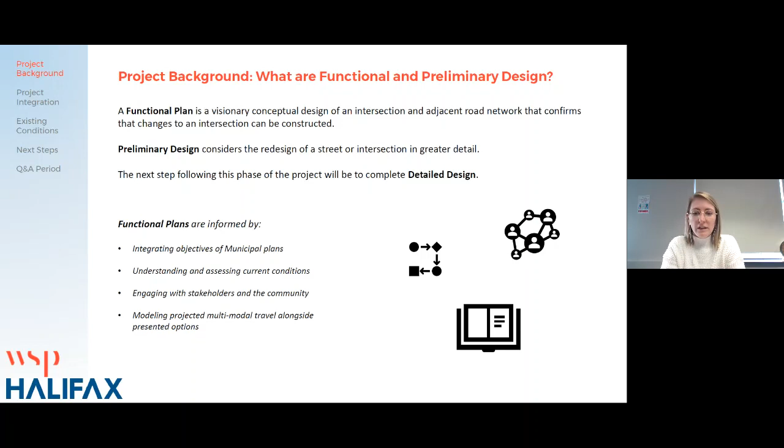Following that is the preliminary design, which considers the redesign of a street or an intersection in greater detail. As Megan mentioned, afterwards there'll be detailed design, which will lead into the construction stages. Next slide, please.

The Windsor Street Exchange was selected by HRM as an important project for a series of reasons. The first is that in 2019, funding was awarded from the National Trade Corridors Fund for the project, so it was the right time to do that. The second is that approximately 48,000 vehicles per day travel through this area. The third is that the Windsor Street Exchange is currently operating above its available capacity during peak travel periods.

The fourth is that Windsor Street Exchange is considered a poor environment for the safety and comfort of people walking, rolling, and cycling. The fifth is that the Windsor Street Exchange will need to accommodate the Bus Rapid Transit Green Line and to integrate with the transit priority from the Bedford Highway. And finally, to address the long-standing bottleneck near the Fairview Cove Container Terminal, which will improve goods movement and which is associated with overseas trade.

Next slide, please. There are three key considerations that the project team will be bearing in mind throughout the project. The first is the importance of the Windsor Street Exchange to the Fairview Cove Container Terminal, and by association, the movement of goods throughout Nova Scotia, Canada, and to overseas.

The second is the competing demands on the Windsor Street Exchange due to being only one of five road entrances onto the peninsula, which is the primary economic center of the municipality. And the third is that there are more stakeholders in this process than in usual processes, due to the many competing interests for this intersection and for the adjacent land.

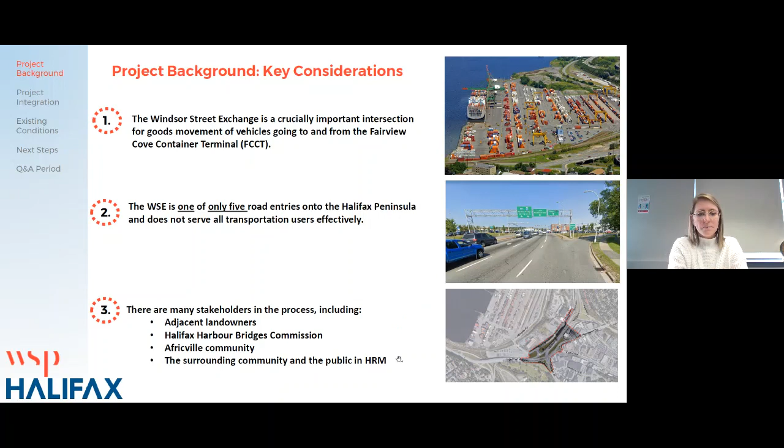We're going to have our first pause for comments here. The question we're asking is: what do you feel is the biggest concern that should be considered in the redesign of the Windsor Street Exchange? If you'd like to contribute an answer, you can follow the instructions by accessing the Q&A box, clicking on the speech bubble in the top right-hand corner of your screen, and then typing into the live event Q&A question box.

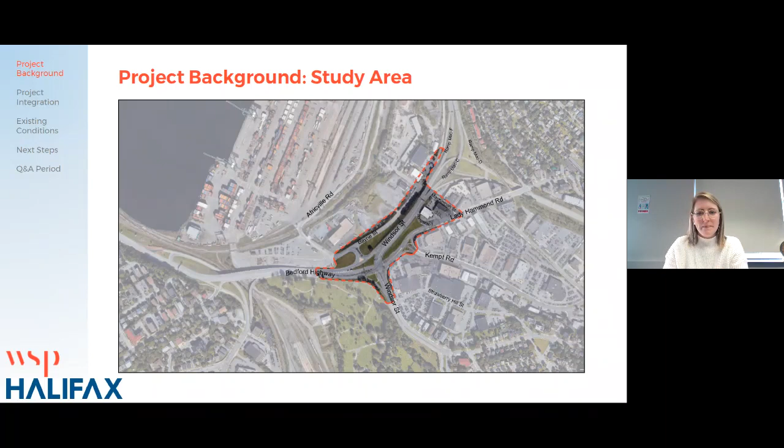The scope of the preliminary design and functional planning portion of this project will have the project team looking at how to improve safety for all road users, how to improve the efficiency and functionality of this intersection for vehicle and goods movement, how to enhance user experience and safety for active transportation users, and finally, how to integrate with the BRT Green Line from Joseph Howe Drive and the transit priority options coming to the Bedford Highway.

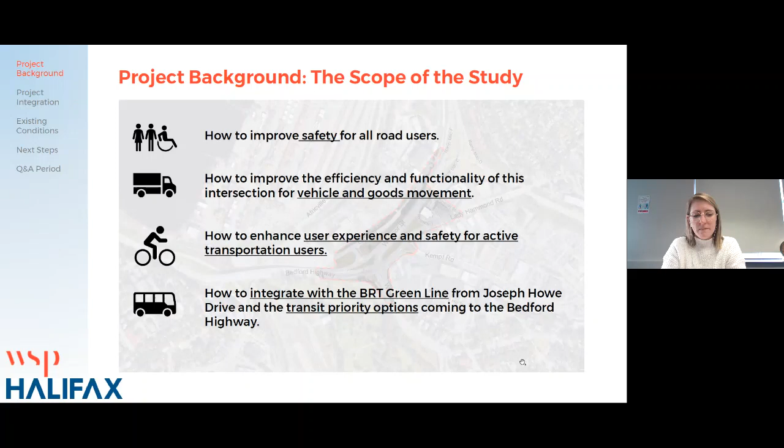Meanwhile, the project team will also be considering how to integrate with other ongoing projects in HRM, which are going to have a direct impact on the Windsor Street Exchange project. These include the Bedford Highway Functional Plan, which includes transit priority measures and other mobility changes to the Bedford Highway, that was endorsed by Council in 2020.

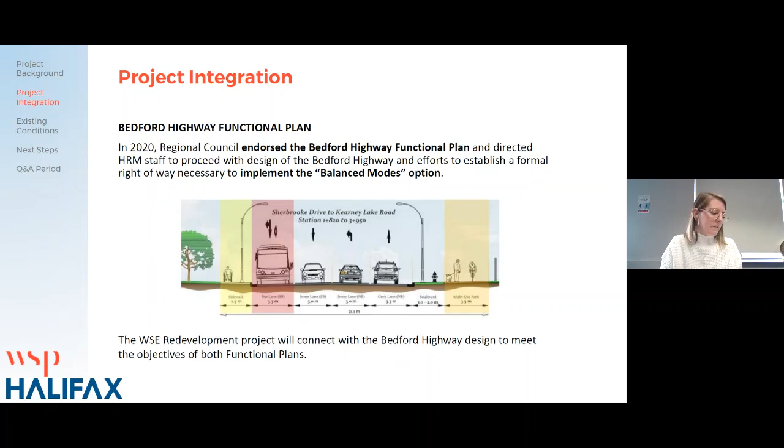The second project the team is considering for integration is Halifax Transit's bus rapid transit strategy. The Green Line and the BRT network, which will operate close to adjacent intersections at Joseph Howe Drive, Main Street, and Robie and Young, will be a key consideration for the project team as we move forward.

The next project for consideration by the project team is the Africville Active Transportation Connections Project. The objective of this project is to determine connections for walking and cycling between the Africville National Historic Site and the rest of the Halifax Peninsula. This project identified that integration with transit was very important. More information and community engagement on potential routes is going to be brought forward as part of phase 2 of the Windsor Street Exchange engagement, which we are anticipating for fall of this year.

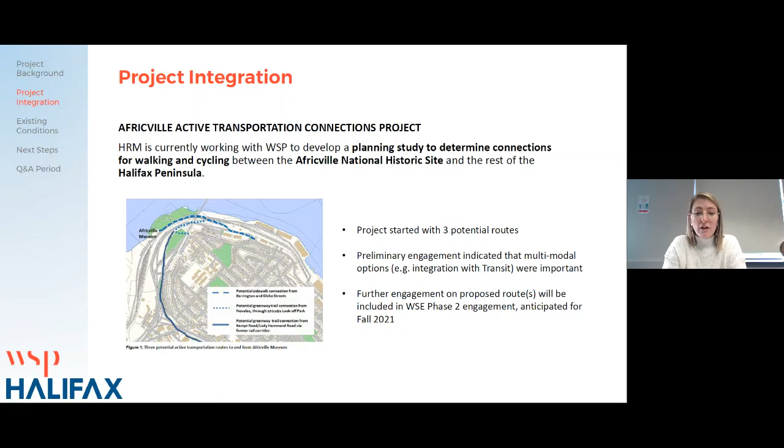And then finally, the Windsor Street Exchange Community Benefits Project. HRM is currently working with the Africville community to explore opportunities for building community benefits into the redesign of the Windsor Street Exchange due to its proximity to the Africville National Historic Site. These benefits could include active transportation connections, infrastructure upgrades, social procurement, or other options as identified with the community.

So I am seeing some comments from our last pause for comments here. We do have a second question on the board, but I'm going to start by reading some answers to the last question, which was, what do you think should be the key considerations for the project team as we move forward in this project? I'm seeing things such as accessibility for vulnerable road users, and that the sidewalks are currently not hospitable to people walking or wheeling, that the current hostile environment for anyone not inside a vehicle is challenging, that pedestrian and cyclist safety and movement on and off the peninsula is an important consideration, and that better transit connections are needed.

Feelings that ease for transit and cyclists should be prioritized. And there is a question here, but we're going to save questions until the end of this, so we'll be able to get to that during our question and answer period. The second question that we're hoping you might be able to provide us comment on is, how do you think the Windsor Street Exchange should best integrate with other projects and neighborhoods in the area? As we discussed before, you can access the Q&A box by clicking the speech bubbles on the top right-hand corner and then typing into the live event Q&A box. I'll wait for some of those to roll in.

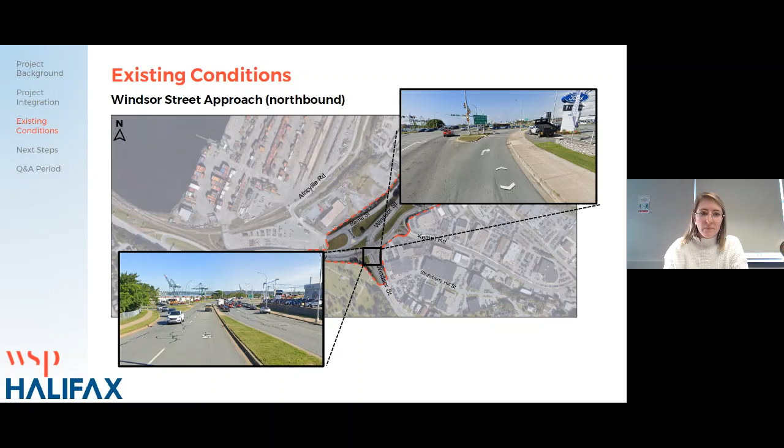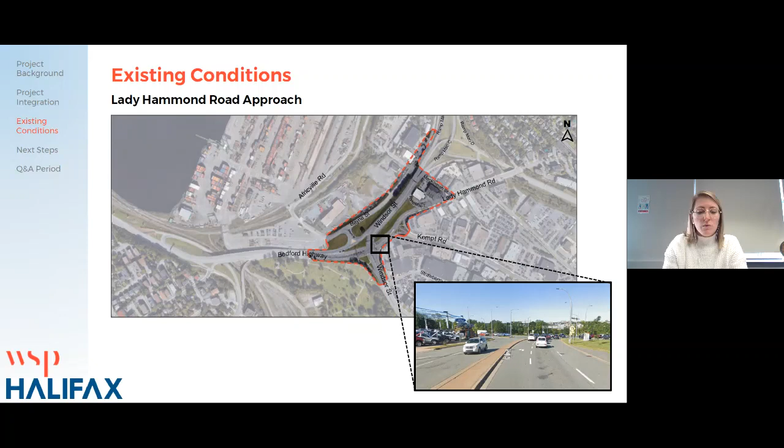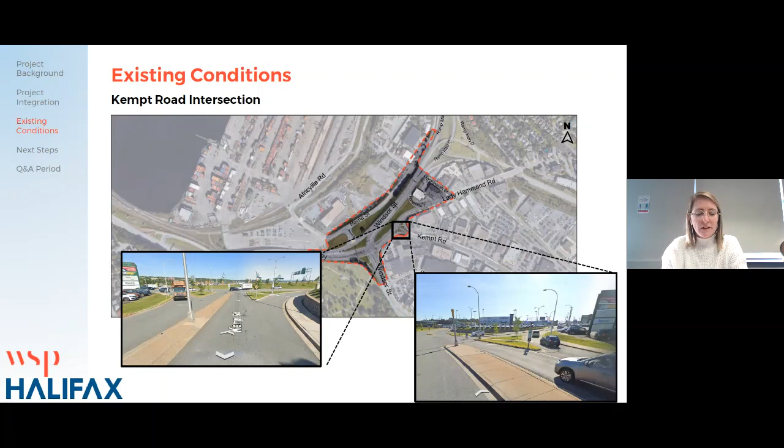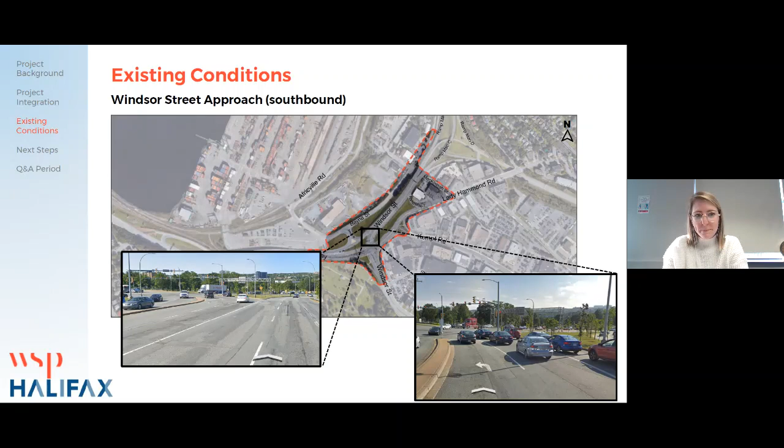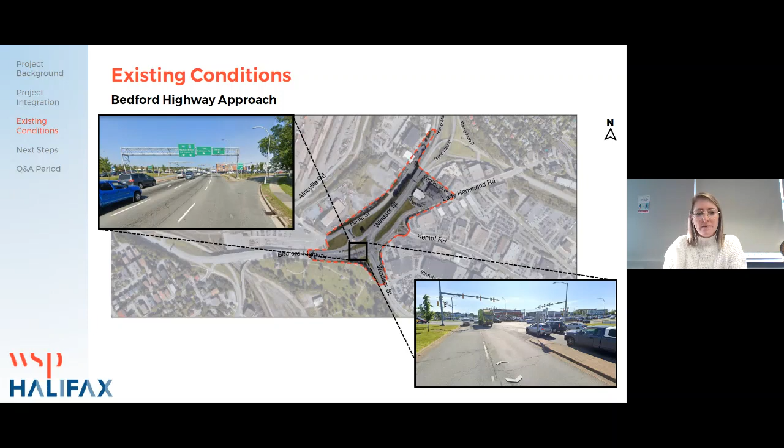We're going to pause for comment again and open the floor. The third question is, what do you feel is most in need of improvement in the study area? There may be some similar answers to this one as before. I know that we've already covered the pedestrian environment needing improvement, the transit needing better prioritization. I'll wait for things to roll in here.

I'm seeing that access to Africville Park would be valuable, and prioritizing how the Windsor Street Exchange can help connect pedestrians and cyclists to surrounding neighborhoods. Seeing some comments about hours of construction, noise, that sort of thing, which will be a consideration later on in the project. And then considerations to adjacent properties, which are accessed off the Bedford Highway, and perhaps improved or at least not detrimental access to the St. John's Cemetery that's difficult to access as it is now.

Give another few moments in case anybody wants to add anything else to what's most in need of improvement. Yes, general safety for walkers and bikers, and also for cars, so less surprise merges - that's what this comment says. Improved timing of traffic lights to prevent the lineups that occur right now. So just general better traffic flow, that's certainly in the scope of this portion of the project.

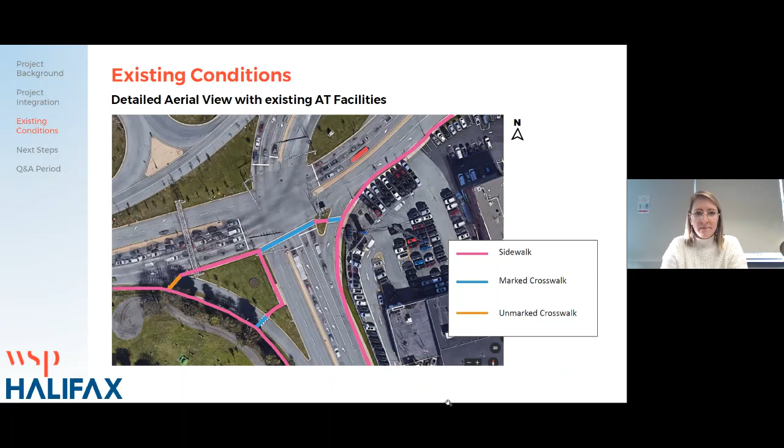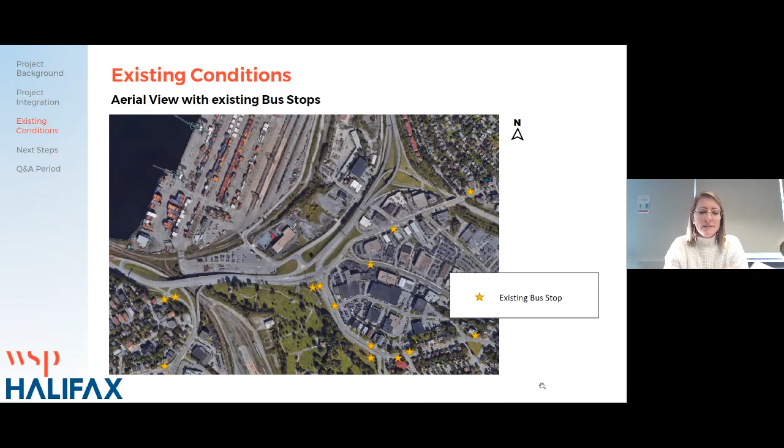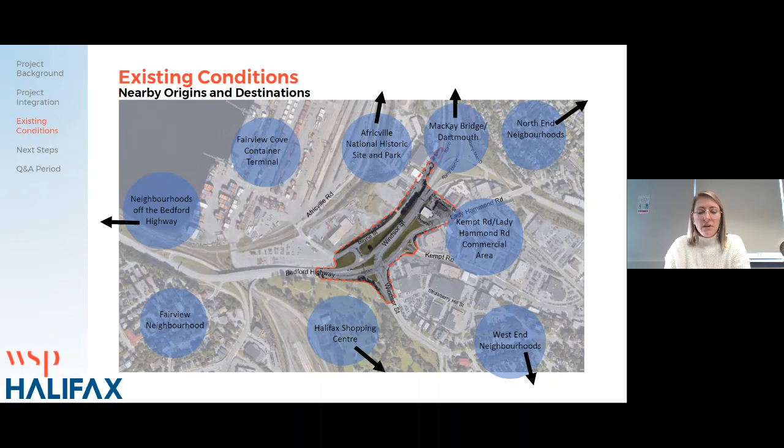Next slide please. So we're going to have one final question period before we move on to our Q&A session here. The question we're asking now is: what origins and destinations do you feel are most important close to the Windsor Street Exchange?

So I'm seeing a couple answers that came in from the last question. Looks like it's similar, so priority for transit, cyclists and walkers, ease of movement to the MacKay Bridge, pedestrian crossings, cycling connections, speed of approaching vehicles, more clarity for people driving which lane is designated for them moving in a direction. Improved sightlines for vehicles and access points for businesses off of Lady Hammond Road. There's sometimes some poor visibility off of Lady Hammond Road.

So we'll move on to this question now, if anybody has any origins or destinations that they feel they'd like to highlight. Africville Museum, yes certainly, so that's part of the National Historic Site. West End neighborhoods, the bridge - certainly the MacKay Bridge is a key consideration here. Mount St. Vincent University - there's a comment here that students and staff often have a hard time getting there on time. Neighborhoods near the Bedford Highway, certainly. Any and all destinations are important, yes.